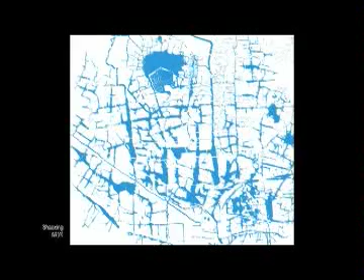When Da Yu came into taming the water, it seems to me -- because I'm really from North Louisiana and kind of country in some perspectives -- they just dug a lot.

You know, if you take enough shovels and have enough people digging, you can find a way that the water doesn't go on the land anymore because you've created a lot of space for it. If you think about the plan of New Orleans, you'll see there's very little water. If you look at the map of Jefferson Parish or New Orleans East and compare it to New Orleans in the middle, you'll see there's less surface water in New Orleans, excluding the river, than in Jefferson Parish or New Orleans East, which is an anomaly. It means the water has nowhere to go except in our streets, cars, or houses.

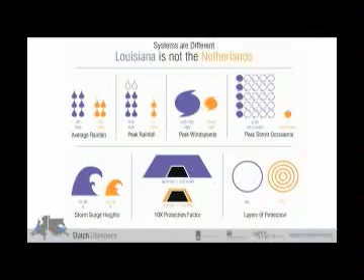If you look at that storm surge, if you look at the levee, what it takes to get us a times-ten factor, if you look at the peak rainfall, ours is far higher than theirs. The 60 inches, 40 inches, is not a big issue - the big issue is that deluge. So we also have other problems, and this eroding coastline is the first problem.

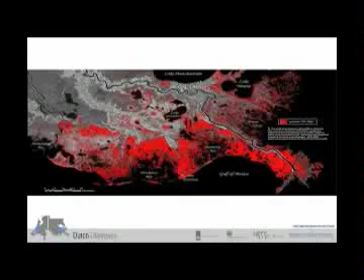So Dutch Dialogues was not set up to solve the coastal problem. The coastal problem is essential - we can't live with this situation, we can't have that future. We have ideas about how to alter that. There are good coastal scientists, and that part of the discussion is integral. These are not separable layers.

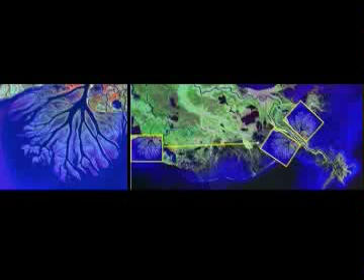And there is hope if we can control the river. But as I realized right after the storm, our issue in South Louisiana is a continental-level problem. The drainage basin encompasses the whole continent, and we in Louisiana can't fix the whole thing. We have to advocate, and we have to become much more passionate and persuasive about our need.

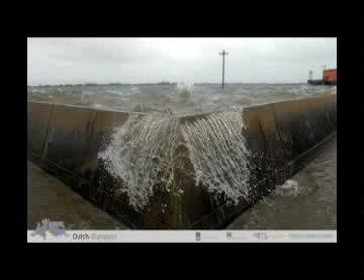The second level of protection is the levee protection system. Dutch Dialogues was not intended to address the levee situation. This Gustav image is a frightening image - it's not a comfortable image.

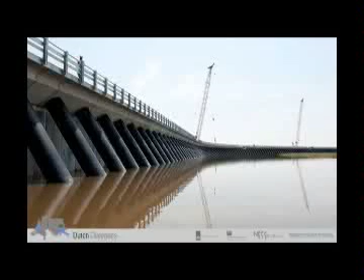That's the industrial canal. This is outside the industrial canal, the MRGO closure that's being built. Whether ecologically it's the right approach or not, I don't know - I don't see anybody from the Corps here. It does provide significant storm protection. So that in fact is the closure structure at the MRGO.

So within that situation, within those barriers, those lines of defense, coastal, then the levee protection, we started looking at the internal stormwater management thing, figuring that the one thing that the city of New Orleans and all its planning processes really could do something about was urban planning, urban design, and water.

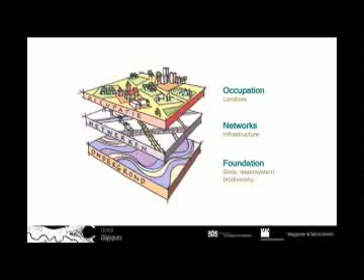This is the Dutch process, the Dutch process of thinking. It's fundamental. It's basically the book in Europe now, which is you start planning from the foundational level, from the underground, as some people say, soils, water system, and that other important word there, which is biodiversity, because that also addresses mosquitoes.

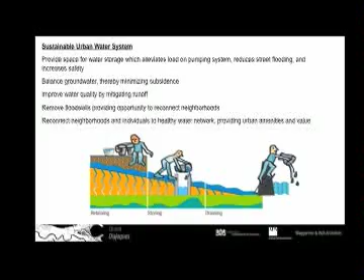And then you get into the networks and infrastructure, and then we get to where we live, which is the occupation level. So a sustainable water system looks different from ours because it stores a lot of water where it falls, and it only drains it when it needs to, because what we want to do is keep it where it falls. That also saves energy, which is part of the big complex, isn't it?

So Dutch Dialogues 1 and 2, quickly, we in Dutch Dialogues 1 only really had an exchange of information. This was a map that was done, a comparative map, I think that was done by DHV actually, and Piet Dircke from Arcadis showed it. This shows that in fact the deltas are similar in size between the Netherlands and ours.

And then there was a comparison of rules and regulations, and we operate in different conditions. They do not have flood insurance in the Netherlands. That's a higher degree of confidence than we have. They got a 10,000-year protection. We got 100, maybe. It's not a very good investment model.

So then in Dutch Dialogue 2, we looked at 3 scales. And in transitioning to Derek, who's participated in both Dutch Dialogue 2 and 3, we look now at safety first. We looked at the multiple lines of defense. We're looking at urban, right? Number 5. But you've got to consider what happens on the outside to protect the inside. And then you have these backbones, safety levels, stormwater.

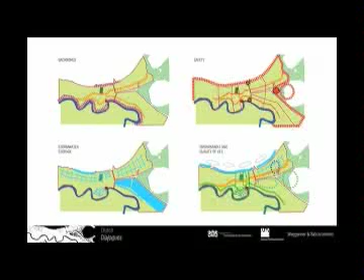Storage. That's interesting. Store water. But it's all for quality of life, because you're not building it to have a beautiful machine. You're building it so people can live in it.

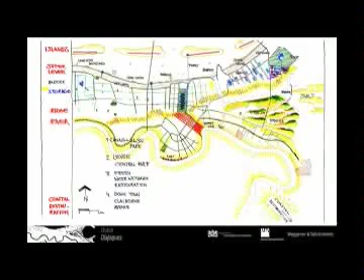If you look at this left-handed drawing, you can see the line that goes through this Gentilly Ridge. You can see the idea of islands, which is supplemental protection of the lake, maybe, maybe not. Claiborne Avenue was identified by us, yes, but also permeated by the Dutch as a key component for reconstructing New Orleans. I don't have to talk about that in this room, but follow. It's an interesting discourse that will go on.

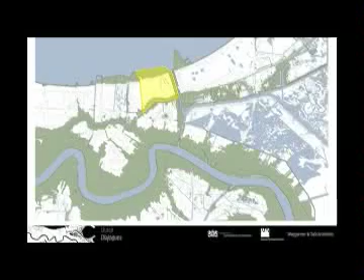The middle scale we looked at was Gentilly, that yellow area. Gentilly, in fact, at that point looked like this. Hardly an urban situation, devastated, no trees. We looked at a plan for Gentilly that would introduce water.

You see the island lurking out there because the Dutch love islands. They go on vacation somewhere every year, many islands. Elysian Fields. Because when you're doing water-based planning, you're also looking for long lines and connections. And with UNO there, it's a very important street.

This rendering seemed to get a lot of attention, even though we were saying no, we want to look inside the levees. But everybody wants to talk about the island outside the levees.

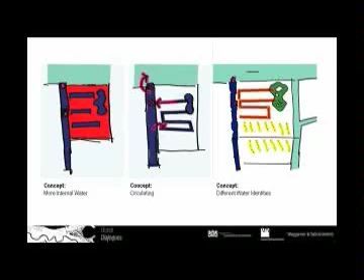Stormwater storage, a circulating system, and different water identities. Some things are nothing more than wadis or storage places. Some things are canals. Some things are actually water bodies. There's no sole identity that water has to take, but it does need to move.

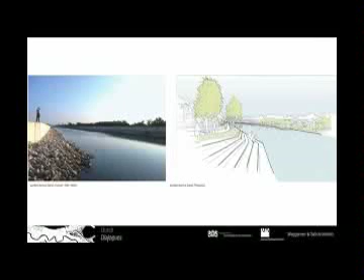This was a drawing, and it'll come back in the second part right after I finish here and turn this to Derek, about the outfall canals, which are a shameful waste of opportunity. You see what we have and what we might have. At that point, we thought.

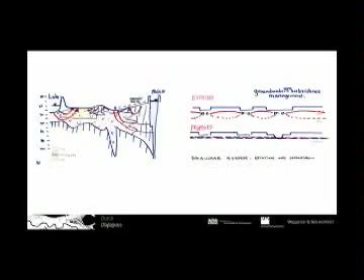Lastly, we looked at the smaller scale, the Hoffman Triangle area, a low-lying part of the city. If you look at that north-south cross-section, with the lake on the left and the river on the right, the river is very deep. It's a trick question to visitors, but some of you may not know it's 60 meters deep or more at the French Quarter.

Which has incredible groundwater pressure. And then you get this drawing made by this groundwater expert about balancing groundwater, which is another key if you want your infrastructure investments to last. Groundwater balance is fundamental. Soils are fundamental. If we don't deal with these things, we're basically building our house upon worse than sand.

So we take these areas of urban blight. This is Felicity Street. And we say, what could you do? Maybe you could create a water system. This actually started at the river, but there's just this drawing at the end. And then you could have this area that had water somewhere out there instead, and probably has higher real estate value, with or without the electrical poles.

And then when it rains hard, you have a place the water goes, so it doesn't just stand in the street and you can actually run. So if you go back to Dayu, you're trying to get space for water and you're trying to get it below your feet.

It's not that complex. But now I'll turn it to my good friend Derek and let him talk about Gutter to Gulf, and I'd like him to explain that title, if he will, since he's an architect too.

Thanks, David. Let me see if I can pull this one up. So, hi. Gutter to Gulf.

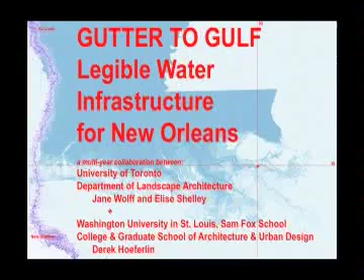But a couple of years ago, a colleague of mine, Jane Wolff, who taught with me at Washington University in St. Louis, and now has gone on to be the director of the Landscape Architecture Department at University of Toronto, we had been working down here in different ways with community groups or through Unified New Orleans Plan or with David for a number of years, and we thought, how could we start to help parallel and have students and academia enter into this conversation?

I know it's probably kind of difficult for me in this kind of venue to come to the table with student work in terms of how it gets perceived or received. But I think the importance is to see how it becomes a message and an advocacy effort and less of pie in the sky ideas.

To back up a little bit, I've taught at WashU. I used to live in New Orleans, and I've taught 5 studios now, the last 2 being Gutter to Gulf. The idea of Gutter to Gulf is about working at different scales, from the gutter of the house to the Gulf of Mexico.

But the previous 3 studios, I was working with many different community groups within the city at different scales. So the title really, the extraordinary, the everyday, and Gutter to Gulf's pursuit of exposure, really gets to the root of what we're after. So many of these issues we talk about, water management, what does it mean? It's so hard to uncover because it's rarely seen.

But our work is not necessarily about the extraordinary, the hurricane, the worst case scenario, as David was talking about - that deals with the much more regional issues and the perimeter issues. Again, it's the everyday. So we've got this condition right here. This is in February, a photograph that one of my students took in the upper 9th Ward of heavy rains leading to localized street flooding.

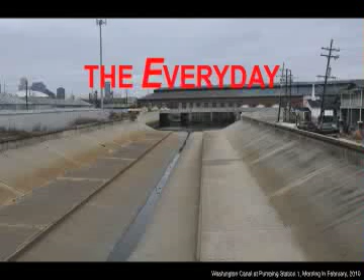This is right outside his office at the corner of Jackson and Britannia Street. And this is the Washington Avenue Canal, Pumping Station 1 by Broad Street in the morning, which one of my students took.

Then later in the afternoon, this was it filled up after heavy rain. So again, we get this, and most people in the audience understand that water is out of sight and out of mind. Everything's buried below the street, and water levels in much of the city are above the eave lines, the gutters of the house.

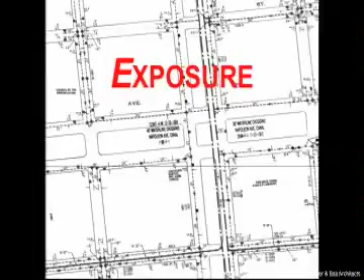So with this idea of exposure, what we've had the students trying to uncover is how do you work with accurate base information. This isn't just pie-in-the-sky speculation on what a street or neighborhood does in terms of water—we're trying to work with accurate information as best we can.

These are some of the sewage and water board maps, courtesy of working with Waggonner and Ball and other sources. We have a website, guttertogulf.com, that shows last year's work, the first year's worth of work.

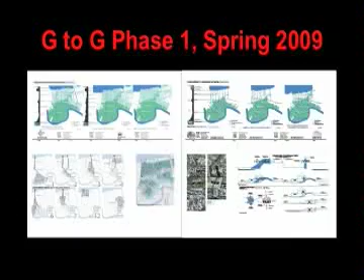The work itself is heavily based in research, so it's not a traditional architecture studio. It's architecture and urban design, but it's also questioning architecture's role, or architecture students' role, in dealing with water management issues, and how design plays a part of that as opposed to just engineering.

In the first phase, we worked with the best base information we could find. A lot of it was inaccurate, a lot of it was hard to find. It was a struggle for the students, but it's always good for students to struggle.

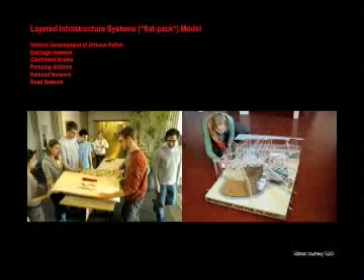We started to build a series of models and drawings with the information, trying to expose the infrastructure systems of the city.

This is a kind of crazy model we built and brought down to leave with David as part of the Dutch Dialogues effort—a model of New Orleans that's not your typical model just showing streets and houses, but actually shows all the layers of major infrastructure: the major highways, the pumping stations, the underground drainage, the rail lines, the street network, and how those systems work together.

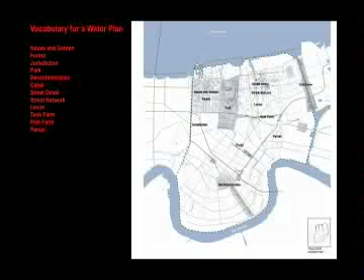Throughout the semester—a 16-week semester, spring of '09—the students came back after our field trip to New Orleans and came up with a vocabulary for a water plan. This is not a traditional master plan in any sense; it's different words that deal with water and how they can operate across the city at different scales.

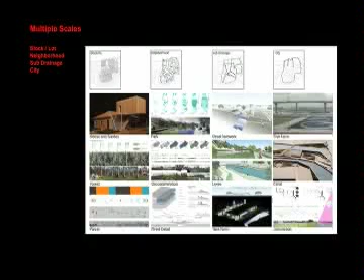Instead of just looking at the scale of the block or the lot, traditional architecture, students were also looking at what it means for water to operate at the scale of the neighborhood, the scale of the sub-drainage unit—which would be more or less the scale of the planning districts of New Orleans—and of course the scale of the city, larger scale interventions within the city.

So that was the first year. The second year, this past spring, we were able, with David's help and others, to start working with more accurate base information. We started off the semester with a question that's ongoing, and I think it's worth the audience thinking about too.

We had a threefold charge. The first was for the students to simply analyze the planning district and jurisdictional boundaries of the city and how they relate to the drainage units of the city, Drainage Basin 1 in particular.

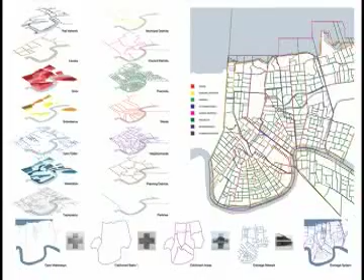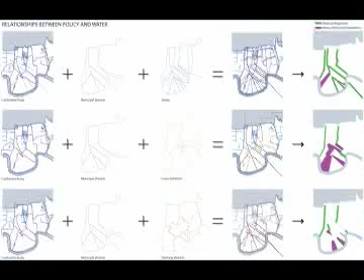What we started to do was see how the physical structure of the city—on the left-hand side, the rail network, the levees, the soils, the open water, what you can see—overlaps with the policy aspects of the city, the invisible boundaries. And they don't, pretty much.

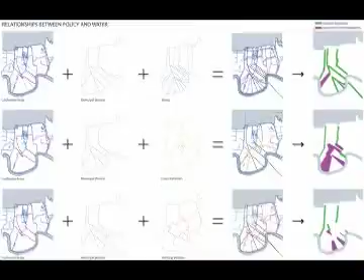On the right, you can see these purplish and green zones. That's where these different political boundaries misalign or align with the sub-drainage units, which are what the pumping stations are based on in the city.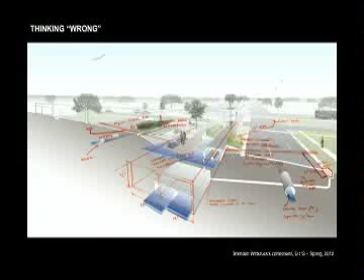Then this past spring, my students with better information were able to correct it, to realize what Andy, who now works for David, was drawing was interesting, but there were certain issues because we didn't know what the culvert sizes were, et cetera. So this is a long-term, ongoing learning process that we're going through.

The third main aspect of it was to generate classification systems of the drainage within the city. So the students and faculty worked together to develop taxonomies for the historic remnants, navigation routes of the city, open canals, and underground canal system.

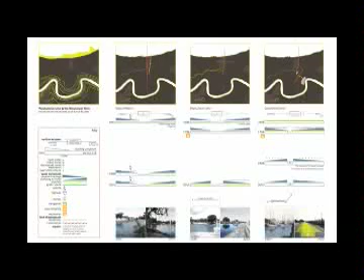For the historic remnants, we did a series of drawings to show the development of the city over time, and then a coding of how the different canals and drainage pathways were altered and got kind of out of whack with the issues of subsidence and development throughout the 20th century. And real simple cross-sections that showed what they used to look like and what they look like now.

The navigation routes start to take a step back and understand Drainage Basin 1 in Orleans Parish within the larger structure of the region. And then construct informational drawings that show how aspects like the riverfront along the Mississippi have developed over time and become harder edges.

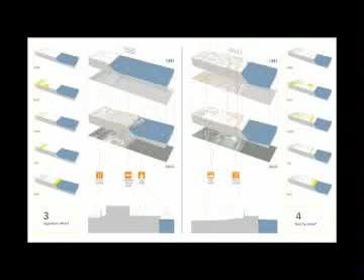Open canals are simple drawings that show the different types of canals that you can see, such as Washington Canal or London Avenue Canal, and then how they relate to the larger drainage network of the city. These are, again, trying with the best we can, base information and numbers to back it up.

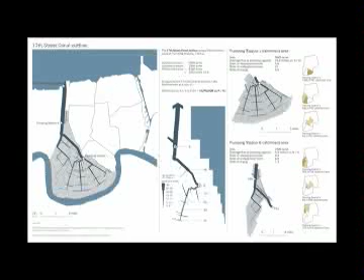Finally, were the underground canals, where we're showing how the water moves throughout the city in these different sub-drainage units in Drainage Basin 1, and the capacities that operate within them. And then a series of drawings that show all the different culverts, single box, double box, etc.

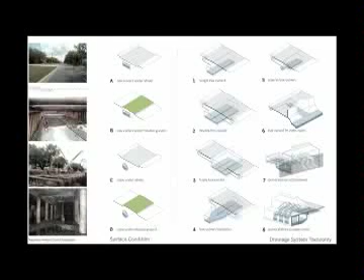These drawings start to talk about how water moves through neighborhoods and how it gets to these pipes and then eventually out to the lake.

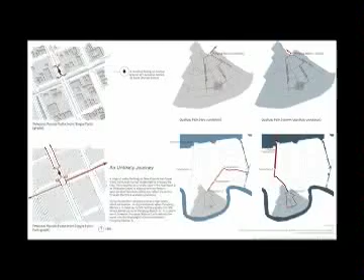In the bottom right, you can see these red lines that show, on a dry day, where the water goes and out from, let's say, the Mississippi River's edge along in the Garden District. The journey of the water will eventually make it out to Bayou Bienvenue. As opposed to during wet times, it switches its route and goes out to Lake Pontchartrain.

So we're really trying to uncover what this underlying system is and then how you engage with it and supplement it. There are kind of four parts to our work: research, speculate, disseminate, and collaborate, to make it within our sights, within our minds. What does it mean for the future of New Orleans?

It's not necessarily these really wacky ideas of how we can live with water in the city, but trying to seek out more publicly visible ways to showcase the student work.

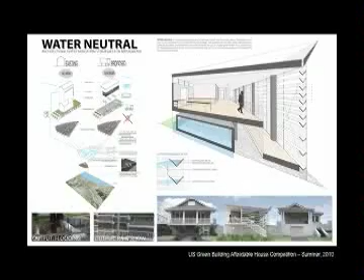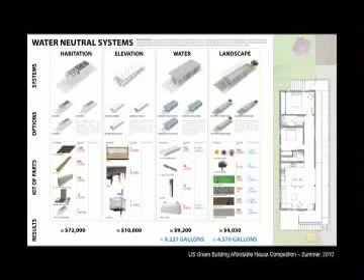This was a competition that a couple of students entered in the Broadmoor neighborhood about speculating on affordable housing, and they were taking on the house prototype and using water really to be the main design component of the house. So you could create a water-neutral house and site so it wouldn't burden any of the existing drainage system within the neighborhood. It didn't win the competition, unfortunately, but it was a strong project.

This is another project at a bigger scale where a student was doing a soil taxonomy, specifically looking at the Elysian Fields corridor. David alluded to earlier, in the Dutch Dialogues, the Gentilly project that was looking at Elysian Fields connecting the river to the lake.

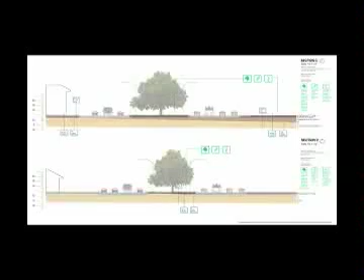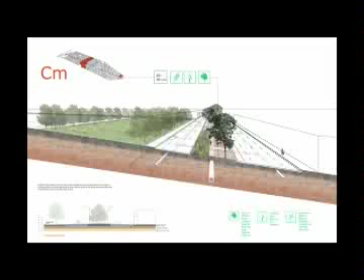The soils that exist throughout that transect, throughout that main boulevard, change throughout. So it basically tells you, if you start to look at what type of tree plantings, tree types, soils, and grasses you use within that corridor to help mitigate the storm water, it changes. So instead of Elysian Fields being perceived, albeit gorgeous as it is with its live oak canopy and green all the way through, he was starting to question how people can inhabit that space in a varied kind of manner, and then help, from neighborhood to neighborhood, mitigate the water storage system, or the water system.

I'll end on an ongoing project that isn't public yet, even though I'm talking about it. If you go to the website it'll say 'in production' since we're making sure everything's tight. The students are working on a website called NOLA is Water, part of Gutter to Gulf. It'll be an educational, informational site for anyone to use, with a whole series of words dealing with water within the city.

You can click on these words, and if you go to one, for instance 'wetland,' you'll get bold statements that everyone in the audience probably knows by now, and maybe more Americans know since our president said it. Then you go into it, and it's highly interactive.

I can show the beta test right now - you can move your mouse throughout these areas of the city and see how the different drainage units work. There are also infographics, like showing that a mature cypress tree can uptake 440 gallons of water a day, which is 9 bathtubs. That's pretty impressive, but we continue to plant palm trees instead.

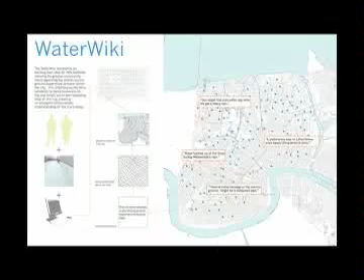With NOLA is Water, we're going to continue to raise more awareness, or maybe turn it into some sort of wiki-based website. These features aren't developed yet, but we'd like to move forward with them.

The idea is that someone could go in and report, say, a pothole forming right in front of them, and enter it. There are big challenges with how you control this information and disseminate it, but I think the legibility is important.

Finally, I'm starting to take Gutter to Gulf and, like with David's work and the Dutch Dialogues' work, try to go global. We can start asking questions - it's important to compare deltas, urbanisms, and watersheds around the world, but we have to be careful why we're comparing them, since issues of politics and socioeconomics get involved. So we're going to have the students and myself look at a bigger scale.

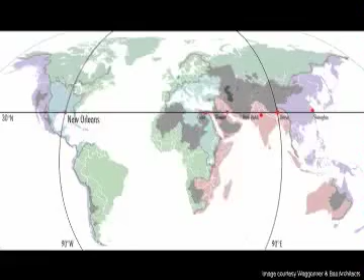This is a really cool map that I'll end on, which David's office put together, showing New Orleans in relation to other cities. Thanks.

I was always troubled by the fact that, as a kid, you got a globe, and New Orleans is at 30 degrees, and Cairo's at 30 too, and our river flows this way and theirs flows that way. I didn't realize that opposite us in the northern hemisphere is Tibet. So why aren't we so low and they're so high - couldn't we split the middle somewhere? I don't know.

It's interesting that students at Toronto or Washington University in St. Louis like this study of New Orleans, this idea about New Orleans. I think the idea has staying power, but it's hard to sustain if we only promote it and don't actually start to implement - design first and implement. We have to begin design.

So, Dutch Dialogues 3 - I'll go through what we did this time. There are one or two major points here, maybe some other things we can go through quickly. It's still an iterative process where we work for 3 days. This time we looked at the middle scale - the area between the London Avenue and Orleans Avenue canals and the Lafitte Corridor, which brought us closer to the river.

This makes the point - where's the water? That was the first question in the first Dutch Dialogues, and the idea that came out was delta urbanism, connecting us to other delta cities, dealing with us as an urban delta.

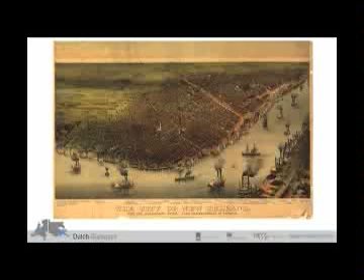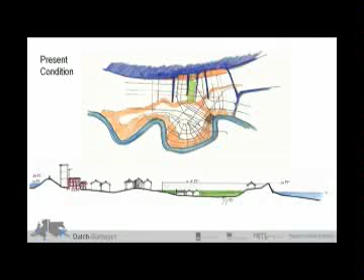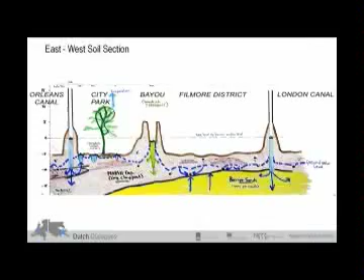This is an east-west section. The same hand that drew the north-south section drew this one too. What you see is an exaggerated perspective again, and you see how absurd that really is with those stem walls, those highway walls on top of the outfall canals, with the bayou in the middle, and then that line across is sea level, so you see the subsidence, remembering the soils.

The existing outfall canal system is in a way the current Battle of New Orleans. I don't know the right victory to search for, but this asks that question. That's the Orleans Avenue Canal on the left, London on the right, and the pumping station back inside. That was the fairgrounds, the racetrack where we have the jazz festival, in the middle.

If you actually get to look inside there, this is what you see. Maybe they don't want to have to maintain it, so they keep the walls out so they don't have to cut the grass, so to speak. But you can't maintain that. The point is, if you go there and scour that, you undermine the wall. So we have ultimately a failing situation. There are 15 and a half miles of those walls in the city of New Orleans.

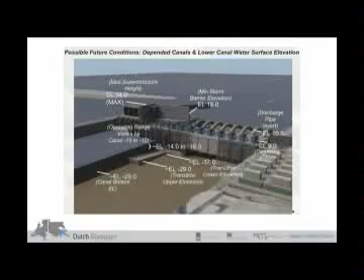Option one, this lingo of those of us who live in New Orleans—and I apologize for the New Orleans-centric perspective, it's not my sole capability—but option one, the Corps of Engineers, is to leave those walls there and basically close it off, and you're going to have to reinforce those walls and live with them ad infinitum.

Option two, or another thing, becomes possible once you put these permanent closure structures at the outside. The permanent closure structures are in process of a design build. It's a very complicated drawing—I've looked at it many times and it confuses me still. But you see the pump station needs to be 54 feet above sea level.

You've got to get the water out at about 10 feet above sea level. But the number that's troublesome is either minus 37 or minus 29—that water is going to be 29 feet below sea level there. The ground's 8 feet below sea level. There's no real benefit even if you take the walls down, because now you've got to put a wall up to keep people from falling in, it's so deep.

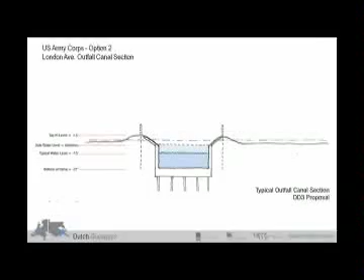So that's what option two would look like. You could actually take the walls down and the water level's way down, but then you've got the freeboard so that you can get rid of the canals and it'll drain by gravity.

So this is what officially we in New Orleans want. The Sewerage and Water Board wants it, the City of New Orleans wants it, Jefferson Parish wants it, the State of Louisiana probably wants it. But we asked—because nobody pays us to do this stuff, right, so we can say what we want—we asked, is there another way?

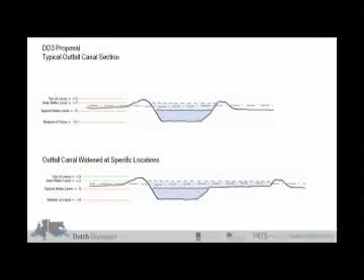The idea put forward in Dutch Dialogue 3 was—this is the bigger scale thinking you sometimes want to engage in—okay, you take down those walls and you get this area where you can work with the top of the levee at about +5. You deepen it some, but you keep pumps in place so you create an operating system. You also look for opportunities to widen the canal to increase storage capacity, because it's all about storage capacity. Water doesn't dissipate unless it's Noah's time, 40 days and 40 nights. You can get rid of it, but you need a place to hold it.

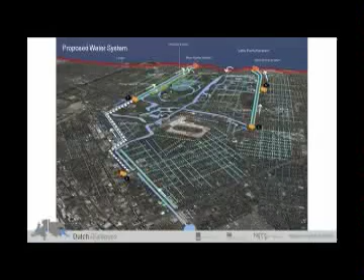So what we proposed was to create a circulating water system that uses Bayou St. John as the source of water into the city. If the lake's at +1, the bayou's about minus half a foot, minus 0.6—I won't get too technical—but you'd set the water level in these canals at -5, and what you've got then is a system where water moves all the time. And now we don't worry about mosquitoes, it's slightly brackish.

So without going into more detail, that is the big idea of Dutch Dialogue 3. It's also, because I'm a moderate I suppose, an intermediate cost component between option 1 and option 2. But it is where all the benefits are—why make an investment if there's no benefit in it?

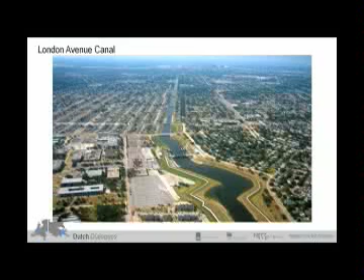So what we get is the London Avenue Canal becoming a green sward with water in it. Instead of this, which we have now, you get this. And you get this opportunity to create space alongside, and I would dare say the real estate value would grow higher, and that abandoned little brown house would become something else over time, because now I'm living next to water.

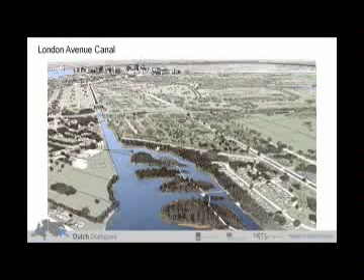So you get the London Avenue Canal then, and this is behind Dillard, where there's abandoned space, and you need the water storage capacity, so you use it for that, and you create a park with water.

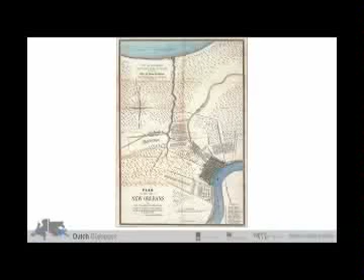Bayou St. John and the Lafitte Corridor were the second thing we looked at, and Bayou St. John's the reason the city's being there. It's Louisiana, I shouldn't explain that too much, but the bayou was truncated. The Lafitte Corridor was the Carondelet Canal, so it was originally a waterway that connected to the French Quarter. By 1800 there was a waterway there. There are different identities through there.

This is pretty much where you have to go show somebody what water could be like in New Orleans. That's fundamentally what we have. You can visit the lake, you can visit the river, but this is what people live. It's a desirable component of life, good real estate, good place to live. However, it just ends. Water stagnates, it truncates, and it's just cut off now.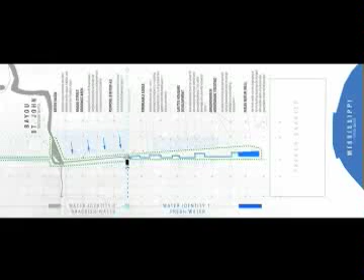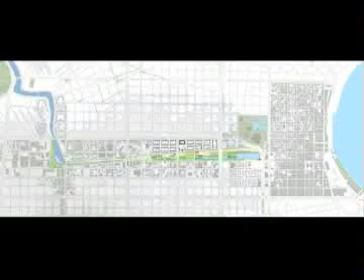So what this plan looks at is, well, if the bayou's coming from the top, you could actually let it continue, create a bigger space for water there at this turning point at Jefferson Davis, and then you get something looking back toward the city where this is no longer just a dead end of a bayou. It becomes quite a nice public space, festival, whatever you want, but it's a good place to celebrate this condition of water.

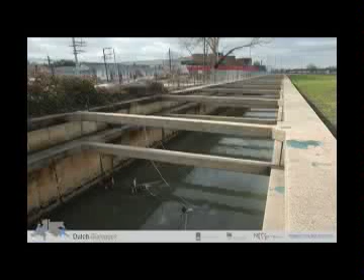The Lafitte Corridor then is this extension that goes to the back of the French Quarter. It's a fallow right-of-way that, through Lake Douglas, who may or may not be here anymore, and some others' advocacy, is going to be designed into something. The city owns it all. It's like this now and like this now. This is what we call, this is drainage, but it's certainly only, it's a hazard more than a benefit.

And you look at other ways to put water in there. Maybe these sections are too technical, but the one on the bottom is, the existing's on the top. The one on the bottom is putting water above water, which is an interesting concept that the Dutch love, and so do I. But I've also found out, having photographed this in Tokyo, that the Japanese do it too. That's water above water. That's a little creek above water storage and drainage in the Arakawa Ward, which is quite a bit below sea level.

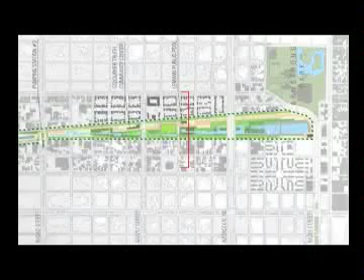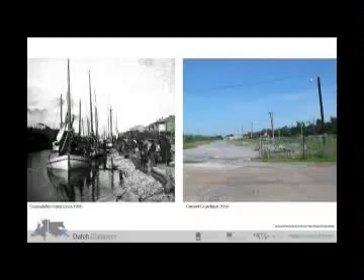So these ideas, there's only one planet here, and there are only so many ideas, and whether there's anything new or not. But then water identities would change as you go down that, so that in an area, as you get closer to the French Quarter, that's the old canal on the left, the current condition on the right, you would get a different kind of identity. It's not an insistent one thing. That would be a brackish identity at the other end. At this end, it would be a fresh identity. And that may or may not interest anybody. It does me. You'd get different kinds of biological, different kinds of life there, different kinds of activities.

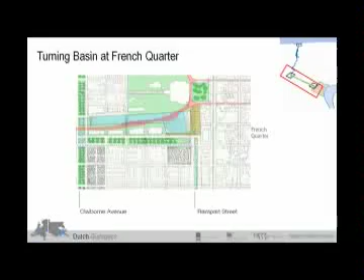So at the turning basin, you would have had this, but you won't get that back. You get something more like this, which is a source of water, a spring, groundwater.

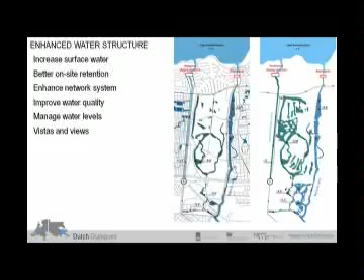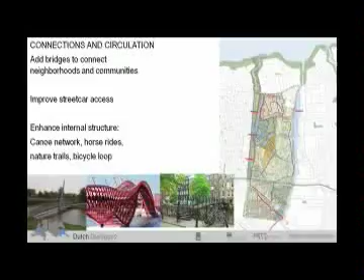City Park we looked at. City Park has a master plan. We're respectful of that. Bob Becker gave us his time and sat there. But the basic thing is that on the right, you see water added. So it's an enhanced water structure for the park, which does things for the neighborhood. And then the park would hold more water. Probably have higher value. Maybe get me there on a Sunday afternoon in that case. And it's already building on the park's identity. That is City Park, which is another place you can see water in New Orleans.

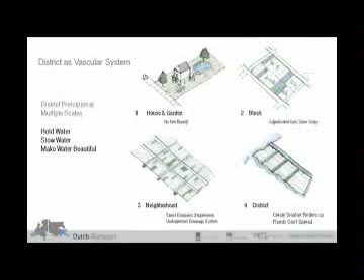So then we brought it back to a district plan. And then at the district plan, there are all these different identities for water. That's City Park on the left in the big area. The idea is this is not engineering, it's more a vascular system. It's not just a drainage system. But there are these different identities from house to block to neighborhood to district-wide. And so I think it's fair to say that there are private responsibilities as well as public.

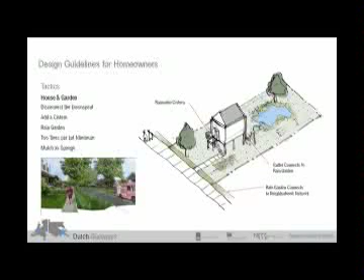One of the things we advocate is Derek's gutter-to-gulf approach: you take care of the water that falls on your site and slow it down instead of just pushing it into the street and then saying, why does my street flood? So disconnect the downspout would be a phrase that would stick there, I think.

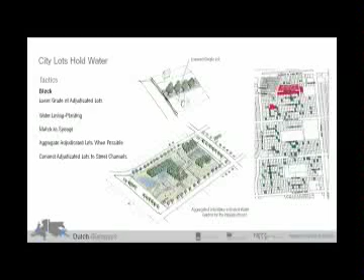Plant cypress trees, and when you get into city lots, they can hold water, and then you can get rain gardens. Portland has a program. Why not us? We have these fallow neutral grounds without much in them, and they can be small canals connected, giving you this plaited water identity possible with vacant lots. So you create a different kind of identity in the area.

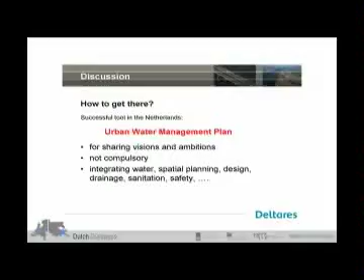How do you get there, in conclusion? This is a slide from Deltares. Deltares is the research institute that Senator Landrieu has her eyes on for us—we'd like that. An urban water management plan is what they say. Well, we think so too. We think that exercise, that consensus-based process, can move this forward.

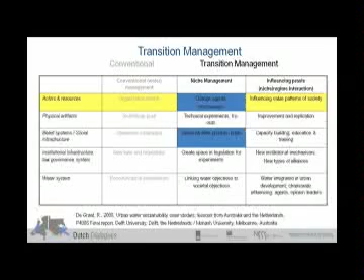We have operated in this other way. We have not been in the conventional role in transition management terms. We are change agents outside the system doing this process. I think somebody might recognize herself in that picture.